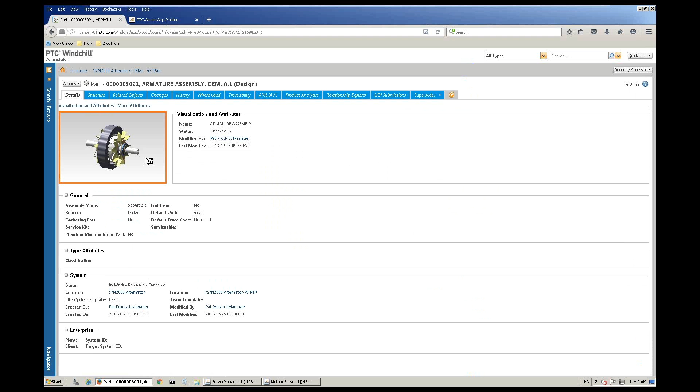So once again, we have our general layout here with the information. We have our structure tab that we can go in and look at as well. Now, this is also one of the enhancements we'll see when working inside of Windchill 11.

It actually has a feel of like Creo View. Like when you're opening up Creo View, if you're working in an assembly, it doesn't pull up the entire assembly at once. It allows you to filter and selectively pick the items that you want to go through and pull up.

So you don't have to go in and pull up the whole top level assembly at once, especially when it's a large assembly.

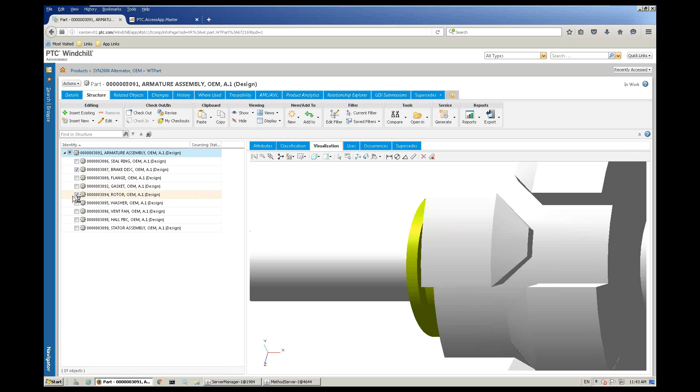So in my visualization, being blank right now, it's simply waiting for me to begin selecting the items that I want to go in and display.

And if I do want to go through and see everything, I'll simply go over and select the top level item, and it will show the entire assembly. I can come through and view it here. Once again, I can go through and select the items here, specifying the items.

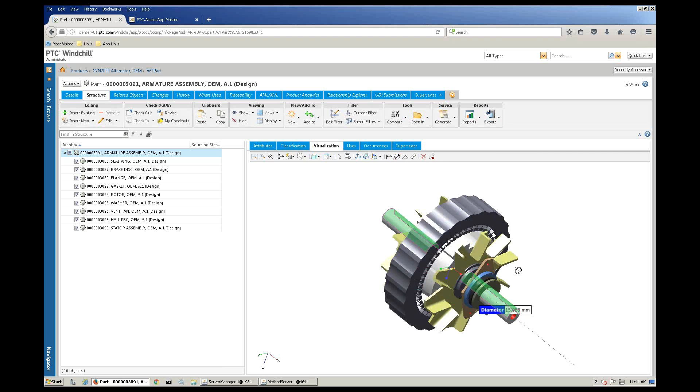I can also go in and do slight measurements on these things as well, where I can create like a diameter measurement. I want to see what the diameter is of this item right there, and it'll go through and show me what that diameter is. So that's another benefit.

So even without going directly into Creo View, if I want to measure some information inside of my assembly, I can do that right here within the actual structure tab for the object that I'm looking at.

The other thing we're able to do is use the product structure explorer that we would go through and use. And that was more of a Java-based functionality.

So it actually took a little bit more time, and it was a little bit more cumbersome to go through and use. So what we're also able to use now is a product structure browser. What this is actually allowing me to do is now open up...

This didn't come up when I just did it a moment ago.

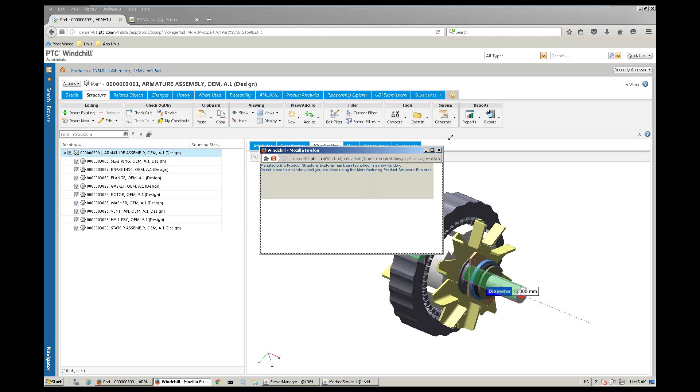Because I pulled up the wrong one, it's pulling up Java. See, this is why we don't use this one, because now we have to go through all the Java stuff.

So what we can go in and use instead is the browser. See, I pulled up the Explorer. The Explorer is a Java-based application, and as you can see, there's a lot that we have to do there to actually pull that up, if we have our Java settings, the security of those. I don't know if you guys have worked with Java in the past, but the latest version of Java actually has more strict security settings.

So if we go in and just simply open up the browser, it's pulling it up simply in a web browser. So I don't have to go through all the Java functionality that was there. So I can go through and view the information as we can see here.

So if I come back over here, what I'm doing is pulling up both versions of this assembly. I have the design assembly, which is basically what the design engineers go in and create, and I also have the manufacturing version of it as well. So we can go through and see each one pulled up individually, compare the structures, and even edit the structures here if we need to.

So there's quite a bit we can do inside of here. Once again, without using the Java functionality, we're using just simply a web browser functionality. So it's a lot easier to go through and use, and a lot easier functionality to go through and manipulate.

All right, so this is our general information. This is our regular Windchill interface. So what we're also able to use, or I should say, for those that don't use Windchill on a regular basis, such as maybe those on the shop floor, they don't need to go in and see a lot of the information or a lot of the complicated information that we see directly inside of Windchill.

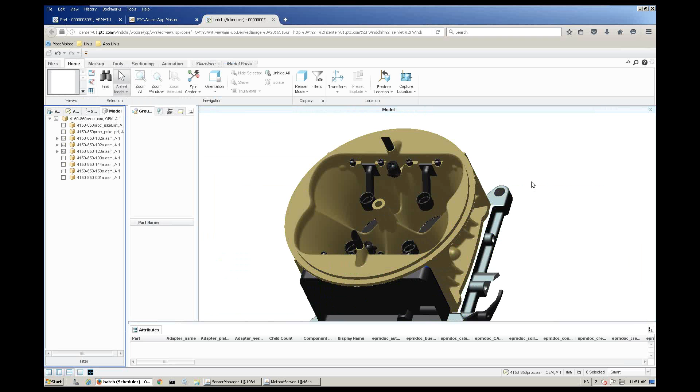Inside Creo View, I can turn on everything, and now I have full Creo View functionality that I can go through and use.

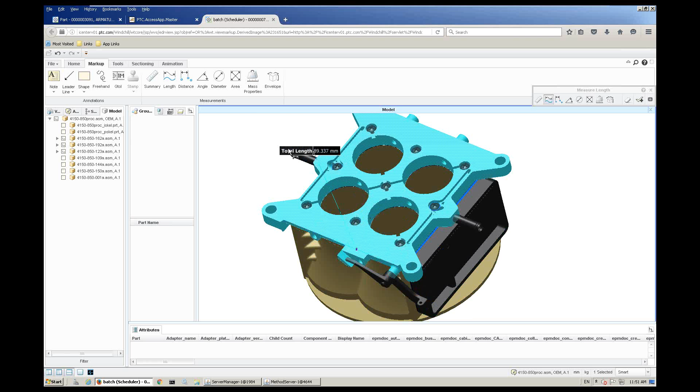Coming over to my markup area, I can measure diameters. I can also measure a length - pick an edge, and it gives me the length of that edge. Pick that edge, and it gives me the total length of those items together. Things like that - I can do simple measurements directly inside Creo View.

So I have that functionality directly from the browser. Once again, I've not touched Windchill, had no reason to go in and touch it. But the other thing that's beneficial is not only can I do my measurement here, but these are the other options that were available on my home page.

If I want to see the parts list, I can simply select that icon, and it'll come up and give me the parts list for this carburetor. It takes a few seconds to put the parts list together, but there it is. Now I can see everything created within this assembly, and the quantities of everything that are there.

I can also come over and do a structure - not just show me a parts list, but actually show the actual structure of how it's put together. So I can see an indented BOM basically of everything that's there.

The other thing I can do is, as I'm selecting individual items, if they have viewables, those viewables will actually show up in the top right corner, giving me information on that. So there's a throttle body assembly - I can see that information there.

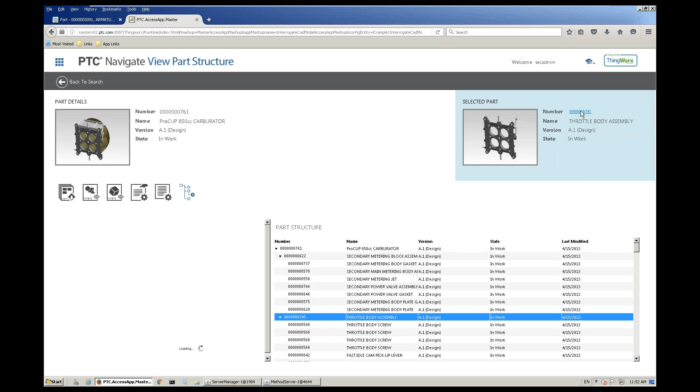And if I want more information on that, all I simply do is pick on its part number, and it becomes the item that I'm actually viewing inside my structure.

Then the same thing here - parts list, measurements, all of that. I can also just do a simple general information view here. We're looking at just some general information: the number, the name, the versioning, and the state, and also attributes like last modified and created.

It would also be good to know who last modified this object, given the date it was last modified. So we can go back into our setup and actually change that inside our Internet of Things by using ThingWorx functionality.

So what I'll do is go back to my landing page. As you can see, each one of these, as an administrator, you will have these little pencils here - those are the editing pencils. As a regular user, you will not have these pencils.

Before I go in and actually change the Internet of Things into ThingWorx to change and add additional properties, I'm going to come over here to the general editing of everything. We're able to specify with the tailoring of the apps, for the search results, what's the maximum number of items we want to see. Right now it's set to 50, and we can change that value up or down depending on how complex things are. That's why sometimes it may take time for everything to come up, because it's generating 50 items, or if that number is large, you can specify that.